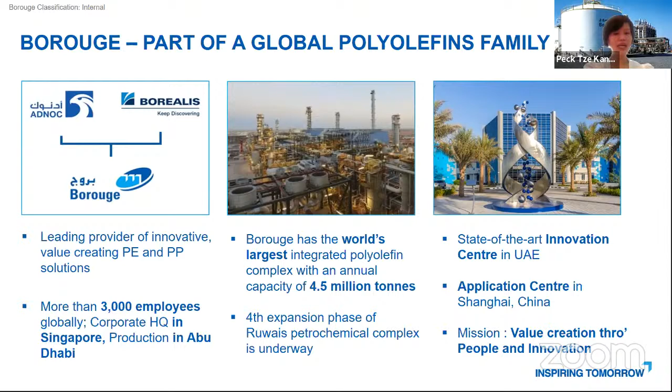First, a few words about Borouge and our commitment to sustainable development. Borouge is a polyolefin company, as shown in my background. This is our production plant in Ruwais. We are a company formed between ADNOC and Borealis. Together, we have 3,000 employees globally, and our Ruwais polyethylene and polypropylene complex has an annual capacity of 4.5 million tons, and we are on our 4th expansion phase. We also promote innovation, with a state-of-the-art innovation center in UAE and an application center in China. Our mission is value creation through people and innovation.

In response to global warming and climate change, starting from our parent company, we have a strong focus on sustainable development. Our parent, ADNOC, is one of the lowest carbon-intensive oil and gas producers, and we are strengthening that position with a 2030 sustainability goal to further reduce our greenhouse gas intensity by 25% by the end of this decade, and also expand our carbon capture capacity by at least 5-fold by 2030. That is equivalent to 5 million acres of forest in terms of carbon dioxide reduction.

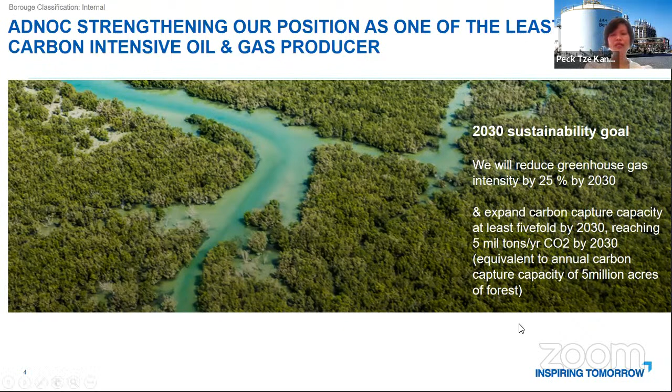For Borouge, our Ruwais operation works on a sustainability strategy based on 5 pillars: reduce flare, energy consumption, waste, water, and greenhouse gas emission. Year by year, our energy intensity and greenhouse gas intensity has been reducing, and we are striving to be one of the lowest greenhouse gas intensity polyolefin players.

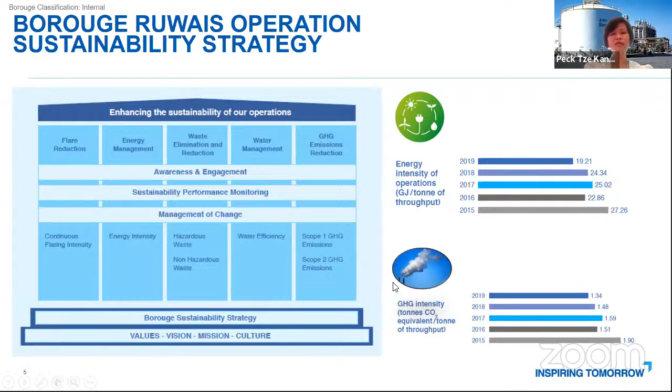A majority of our 4.5 million ton production capacity is dedicated to producing innovative infrastructure solutions used in utilities, for example, gas pipes, water pipes, construction like polypropylene for hot and cold water, and underground sewage systems, as well as industrial applications for corrosion protection and transportation of industrial media.

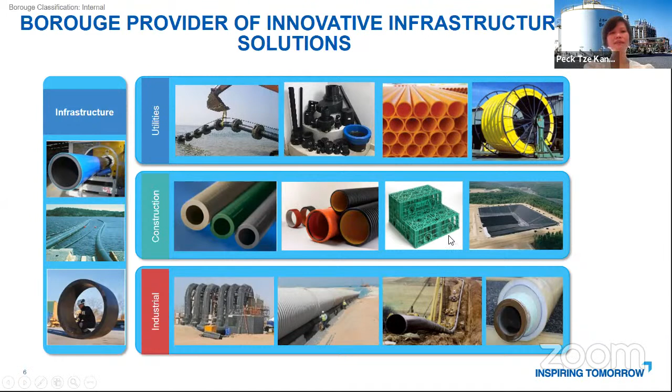For our products, polyethylene going into the pipe application has a positive environmental impact compared to traditional material. This is a study by the European Plastic Pipes and Fittings Association comparing the carbon footprint or environmental impact of polyethylene versus ductile iron, done on the basis of underground pressure piping for drinking water for 100 kilometer length and assuming a service life of 100 years.

Polyethylene is only a fraction of ductile iron in terms of environmental impact. This is assessed across the whole life cycle of polyethylene and ductile iron, from the product raw material to construction of pipe usage and end of life.

In the area of impacting the environment by taking resources, contributing to acid rain, impacting marine life, contributing to global warming, ozone depletion, and also smoke generation, polyethylene is actually much more environmental friendly. This is mainly due to its lightweight and ease of installation that allow fuel efficiency in the transportation of the pipes.

It has long length and coilable system, reducing the number of joints. Hence, less men and machineries are being used in the jointing system. The operations also use less pumping energy because of a smoother bore with very low coefficient of friction. For maintenance, the joints are secured so well that there is very low leakage and low maintenance required. And for end-of-life treatment, polyethylene is a fully recyclable material.

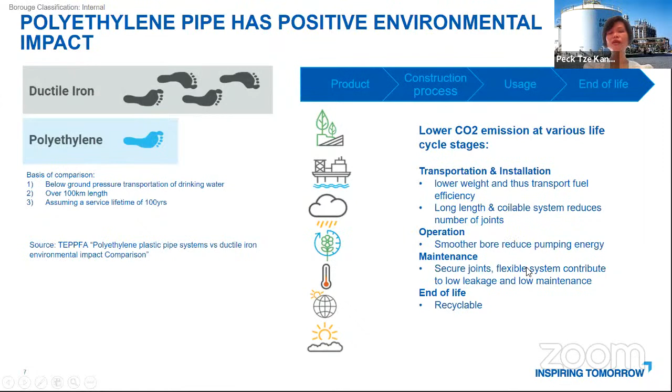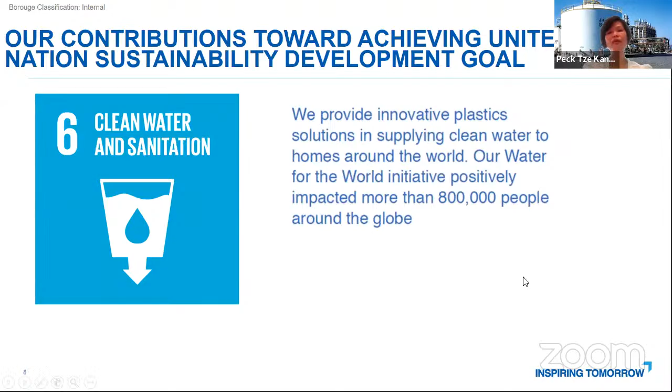With our products, we are also contributing to the Sustainability Development Goals of the United Nations. For UN Sustainability Goal number 6, clean water and sanitation for all, our innovative plastic solutions are supplying clean water to homes around the world. We have a corporate social responsibility program, Water for the World initiative, that has positively impacted more than 800,000 people around the globe. Polyethylene is not something new.

It's used for water and gas pipe because now we have more and more focus on sustainability development. We would like to also touch a few points on it being a sustainable and lower whole life cost solution for water transportation. So where can polyethylene actually be used?

It's used in water transmission and water distribution. For water transmission in high pressure and large volume transportation of water, we can use polyethylene for corrosion protection, like a 3-layer system with epoxy, adhesive, and polyethylene top coat. It can also be a standalone large diameter PE100 pipe up to 25 bar at SDR 7.4.

If the pressure and hence the wall thickness allow, polyethylene pipe can be made up to 3 meter or 3000mm OD. This is stipulated in ISO 4427, the ISO standard for PE material used in water pipes. In the area of water distribution, PE100 and PE80 could fully cover the operating pressure requirements.

It has a leak-tight fusion joint, resistance to ground movement because it's so flexible, and is generally resistant to acidic and basic soil conditions. For transportation of drinking water with chlorine and chloramine disinfection, polyethylene is able to operate well within the aesthetic level.

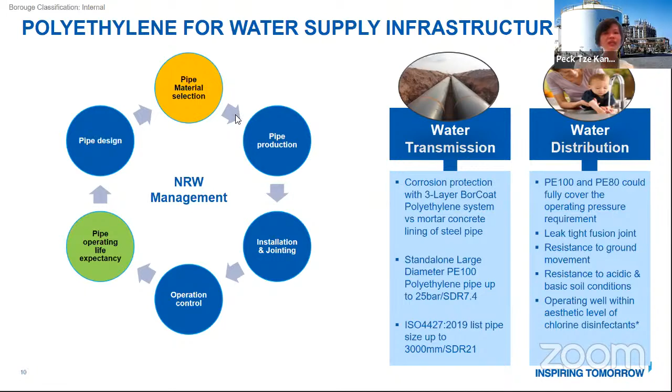Today, we would like to focus on the material because this is what Borouge specializes in. We have 20 years of supplying PE material into this application. Also, our other parent, Borealis, has been the leader of polyethylene for infrastructure application for more than 50 years. So polyethylene pipes are widely chosen for new development and asset upgrades for water application.

It is resistant to corrosive soils. It's so flexible that it can be coiled in very long lengths, even for pipe sizes with OD 180mm, it can be coiled as well. Hence, it is quite resistant to ground movement.

In any cases of earthquakes, if we look at the failure situation or statistics of all the piping systems, polyethylene would be the one with the lowest or even no failure.

With respect to temperature and weather change, unlike other materials which might have more failure in winter or summer because of soil conditions changing according to the climate, polyethylene is generally resistant to such temperature and weather change. From an operating point of view, there might be water hammer and pressure surge, but polyethylene is quite resistant to short-term pressure change up to 3 times its nominal pressure.

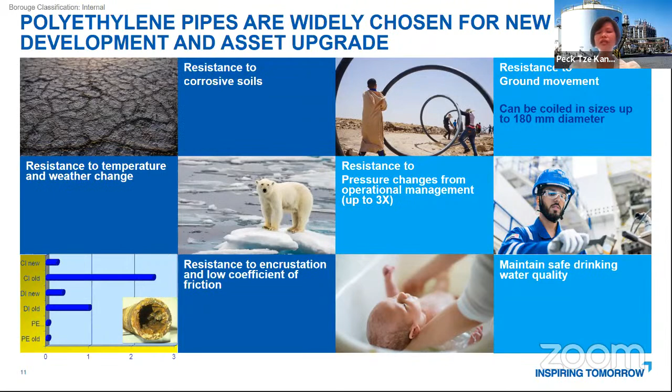In terms of corrosion, it definitely does not corrode like traditional materials. Hence, it's able to maintain a very low coefficient of friction in the inner bore throughout the whole lifetime of 100 years. For polyethylene used for drinking water, it has a specialized additives package that should not be detrimental to health, so it's able to maintain safe drinking water quality.

Now, we are aware that cost is also a very big consideration when deciding the material for the piping system. However, if we are just comparing the cost of the pipe itself, this may not give us a full picture. We should be considering the whole life cost of the system, which consists not only of the pipe, but also the installation cost for a real project.

A real project could be happening on a busy road in an urban setting, whereby you need to take care about traffic management, resurfacing of the road, and you want to have something that can be installed as fast as possible. We should also look at the future operation, maintenance, and repair costs of the full system for the whole expected lifetime of the assets.

For example, 100 years. So a way to do whole life cost is to build a model of a piping system. In this case, a 5-kilometer pipe system with 2 branches, 4 sluice valves, and 2 air valves. We're going to compare the whole life cost between 3 materials: ductile iron, GRP, and polyethylene. The size is 400mm for ductile iron and GRP, and 450mm for PE, which is dimensioned by its outer diameter.

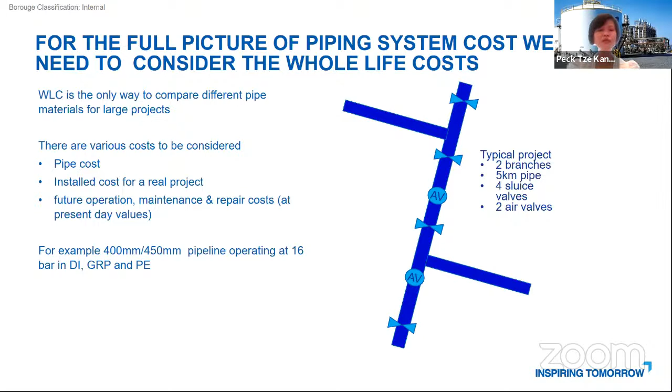So this is done in the UK context, in an urban situation. First, we look at a 5-kilometer pipeline for the installation cost. As we can see from the bottom, for the pipe cost itself in the orange portion, the picture may not look so good for the more innovative plastic material like polyethylene.

As well, excavation, removal, and installation costs could be quite similar. However, when it comes to joining, traffic management cost, and staff and site supervision, polyethylene is actually much lower because it has less joints, it's faster to install due to its lightweight and use of less machinery, and it does not really need anchor blocks. This speed up of installation also reduces the total installation cost.

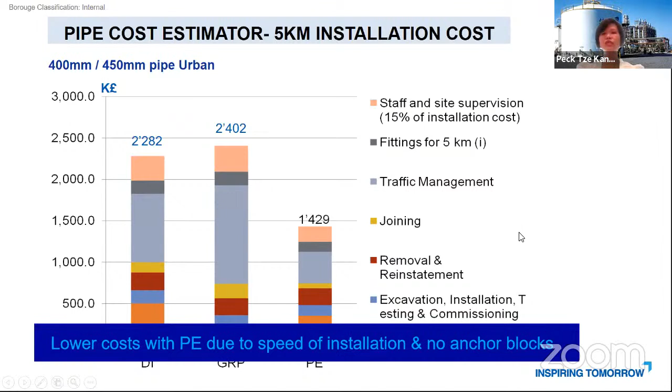Now let's look at repair costs. This is based on UK Water Company statistics of failure. For ductile iron, the failure rate per 100 kilometers per year is 7.5. For polyethylene it is half of that, which corresponds to a much lower repair cost for the whole lifetime of the system. In this case, assumed at 50 years.

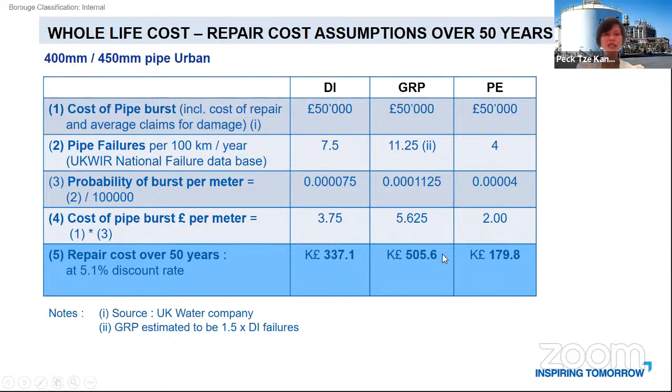So in total, if we compare the whole life cost of the 3 systems, even though the upfront cost of the pipe is much higher, the totality of the whole system cost is actually much lower because of faster installation, lower repair cost, and lower operating cost.

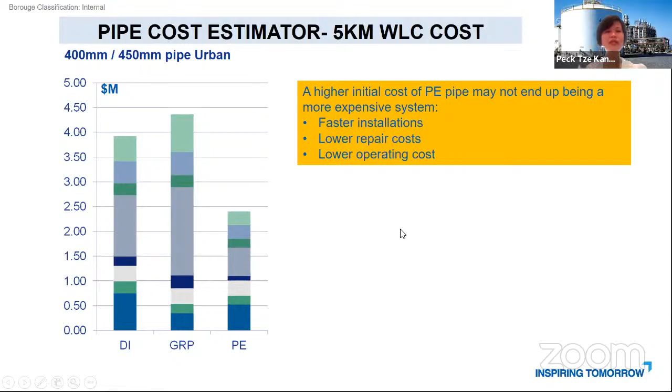Now we would like to give some tips on best practice in water transmission and distribution with polyethylene pipes. Not all polyethylene is the same. We have also seen polyethylene being used for packaging, disposable bags, and rigid packaging like jerry cans. But what is exactly needed or specified for PE material used for pressure piping?

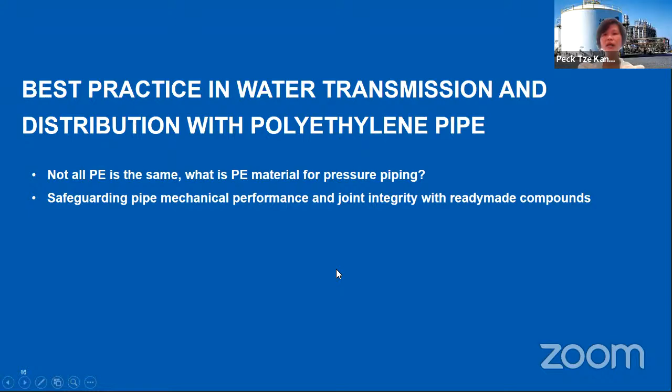There is actually always a way to go around by using a mix of material, like a natural PE with some color master batch. That is actually quite detrimental to the mechanical performance and joint integrity of the pipes. Later on, we'll show studies that we have done to prove that this is actually quite a bad practice.

So PE has been used for a long time, especially in gas. It's one of the best materials. Over 50 years of track record starting from the 1970s, PE has been used for gas, and we know that this application cannot tolerate any failures. As we can see here, starting from the UK, they have been using orange pipes and yellow pipes, PE100 and PE80 respectively, for gas pipe.

Coming closer to us in Southeast Asia, Indonesia is also having quite a boom of gas piping requirements, as well as India. India has a lot of city gas distribution projects going on, and they will only specify compounds, ready-made compounds, for gas application.

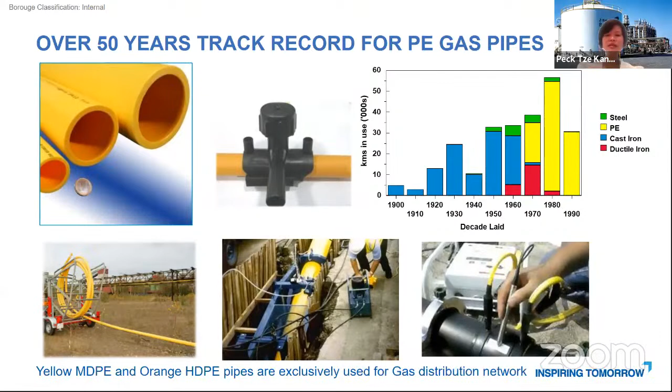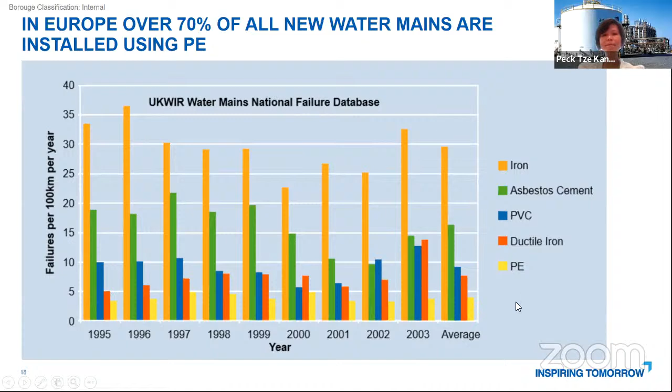A more recent study in 2020 done by Dr. Timothy for Anglian Water region looks at the impact of environmental factors on leakage in their piping system. The cyan bar refers to polyethylene, which has the higher portion of pipe length in kilometers being used. It's used so much, yet the failure rate is conversely very low.

This is based on a lot of reasons, because the Anglian region in the UK has very aggressive soil conditions with clay that has high shrinkage. So brittle systems like AC pipe, and even some older generation PVC, fail during summer when the clay is drying up and shrinking. And in winter, metallic pipes will fail quite a lot as well.

So they do have weather conditions to consider, and they find that PE is one of the best materials, and it's always the material they are now considering going forward.

We still see some failures for polyethylene pipes, and for the Anglian region this is usually because of jointing. Jointing with electrofusion is actually quite a specialized way of jointing, and we need to have good training with the welder.

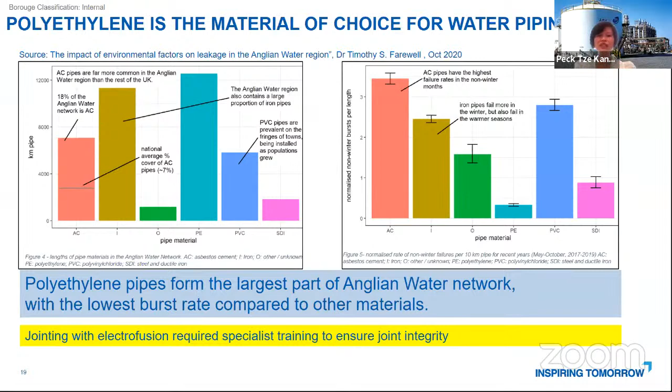If we come to our situation in a region like Malaysia, there is an aim to reduce the non-revenue water percentage down to 31%. Historically, all kinds of piping materials have been used, and polyethylene actually makes up about 20% — one-fifth of the piping system is using polyethylene.

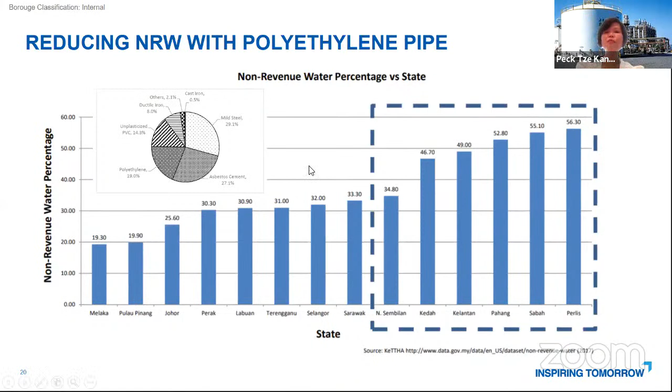I think it will be of great value for us to share with you what is a good material for pressure pipe application in terms of polyethylene. There are many things we know about polyethylene for pipe applications, but there are also some things we are not really so clear on — some myths, some rumors — but I think this is a good platform to clarify them.

Definitely for corrosion resistance, polyethylene plastic systems have no such issue. It's flexible and lightweight, and able to withstand a lot of ground settlement issues. The fusion joint itself is one of the best ways because you don't introduce any foreign material into the joint — it's purely PE to PE with heat. However, there's still a leak tightness issue, which we will address later.

How do we actually ensure 100 years design lifetime with polyethylene? Polyethylene pipes come from polyethylene materials, and we supply them as ready-made compounds — little granule pellets that consist of all the additives and carbon blacks needed for the whole lifetime. This needs to fulfill certain standards, which we'll show you later.

There might also be some question about chemical resistance. Generally, to acid and base, polyethylene has no issue. For disinfectants used in drinking water, chlorine and chloramines have been used quite widely, and in a normal temperature range, it should not be an issue.

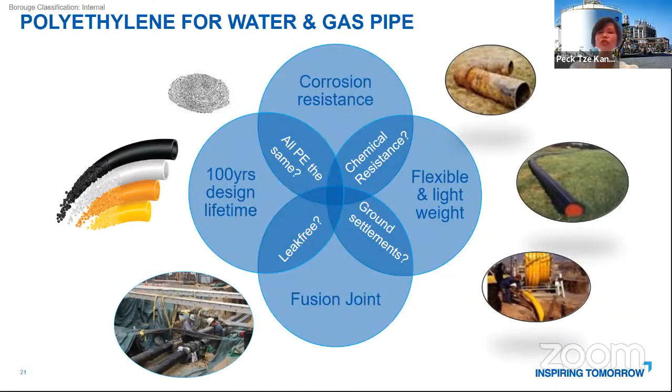So what are the standards that PE material for pressure pipes should fulfill and comply to? For gas applications, it's ISO 4437, and correspondingly there's a European standard called EN 1555. As you can see, there are 5 parts for ISO, and 7 parts for the European standard. This touches on general requirements for the material, the pipes, the fittings, the valves, fitness for purpose, and on the European side, also guidance for assessment of conformity.

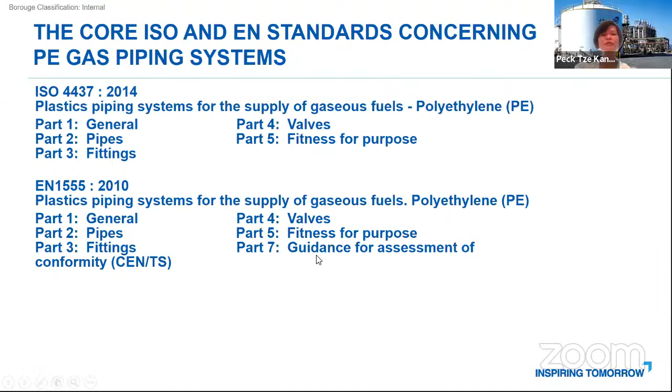Now let's look at the water standards. The water standards are actually quite similar to the gas standards, except for certain specific gas requirements. So we can see that at the standard level, the basic criteria or specification is the same.

I also have a note here that the Malaysia standard currently is based on EN 12201, which I think we have a version from 2011. It's going to be updated soon, and likewise MS 1058 will be updated. With these updates, we are able to set or update the requirements of PE in various aspects, for example slow crack growth and also MFR.

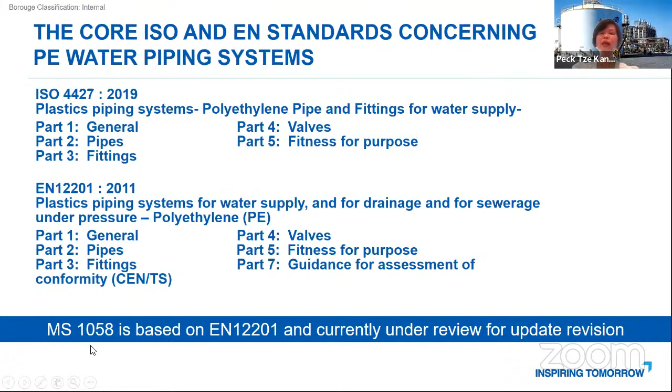Okay, so what exactly is written in these water and gas standards, in part 1 and part 2, for the material and the pipe?

First and foremost, since we've been producing this PE for such a long time, we're focusing on material properties, where we need to ensure that the granules fulfill all performance requirements with these additives. Carbon black master batch has been added to provide UV protection.

When it comes to carbon black dispersion requirements, there's also quite detailed stipulation. Carbon black content needs to be between 2 to 2.5 weight%. Pigment dispersion has to be rated according to standards to have not more than grade 3, and a dispersion rating of not more than B.

The carbon black also has to have a certain size, not too big, because if the particle size is too big, you don't actually get very good UV resistance. So 10 nanometer to 25 nanometer will do the job.

In terms of material properties in the form of pipe, it must have MRS classification. So we have our Borstar technology to tailor-make a bimodal structure that is good for strength and also processability.

However, we still need to prove that this is a material that can last for 50 years, or even 100 years, as a PE80 or PE100. As well, the other two pillars of long-term performance are RCP and slow crack growth.

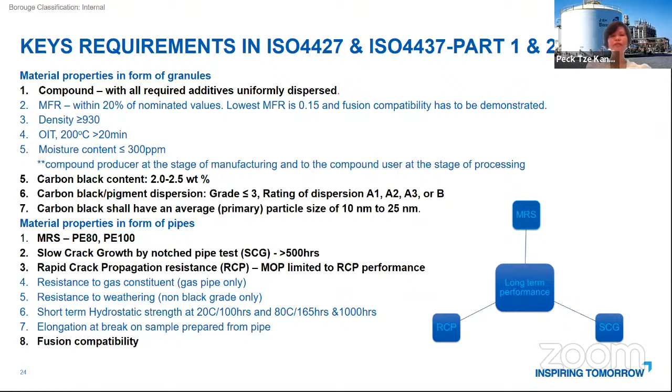Last but not least, we need to look at fusion compatibility of the pipe material. So allow me to talk a little bit about MRS testing. MRS is the minimum required strength that characterizes a PE material for pressure application.

It is a test that will take us up to 1 or 2 years to complete, to certify that the material can go into a pressure pipe application.

This hoop stress level will be between 2 levels, A and B. So a PE100 material simply means that it's between 10 and 11.19. Anything above it would be something like a PE125, which currently there is none in the market. A PE80 material will be slightly lower, between 8 and 9.99, and so forth.

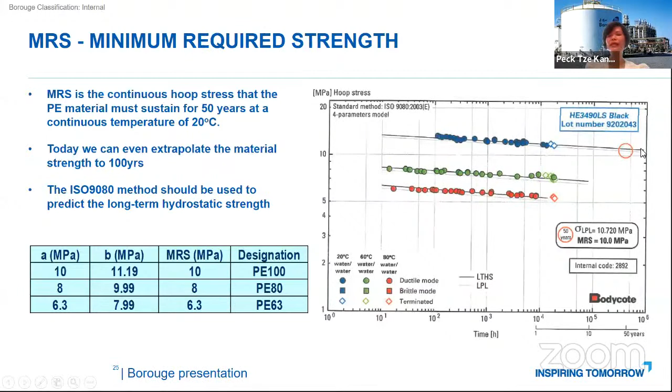So why do I talk about 100 years? From the material point of view, this line can actually extrapolate to 100 years. So 50 is here, 100 is just a little bit more. Nowadays, we are actually talking about 100 years lifetime with polyethylene material.

Slow crack growth: pipes are quite handled on site, and sometimes we introduce scratches to the surface of the pipe. When that happens, even when the stress is removed, the notch created on the surface of the pipe will start to grow and penetrate through the pipe wall.

This is because the stress at the tip of the crack is always higher, and it breaks the polymer chain over time. So a good material, or the more advanced polyethylene, has very good resistance to stress crack resistance. Today, the standards are talking about 500 hours by notch pipe test.

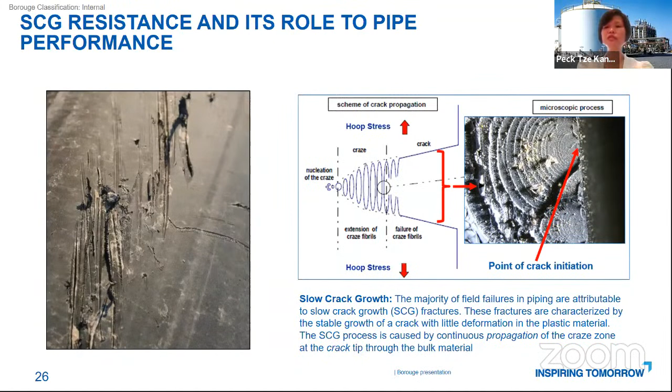There's also PE100RC, which Amos is going to touch on later, that has an even higher requirement for this property.

Now we are talking about carbon black being a very instrumental additive in polyethylene pipes. The function of carbon black is primarily for UV protection. Otherwise, the pipes under transportation or even above ground installation will be subjected to UV degradation that breaks the polymer chain over time. A good distribution of carbon black in polyethylene is very important.

Does it make a difference if a pipe converter uses a natural material and adds carbon black master batch in the pipe extruder? Yes, there is a difference, and we have done this study to show that a ready-made compound with granules already containing the carbon black and additives is a much more secure way to ensure performance and quality. In our study, we did two approaches. One is making our pre-compound the normal way using our big twin screw compounder in our polymer plant, and then taking these pellets and extruding the pipes.

We call it sample one. It is made of pre-compound material with an extrusion speed of 100%. We have a parallel comparison using natural PE material and adding carbon black master batch, doing a simple mechanical mixing and putting it in a pipe extruder. We have samples 2, 3, and 4, done at different speeds: sample 2 has the same speed as sample 1, sample 3 is 80% of that, and sample 4 is 60%.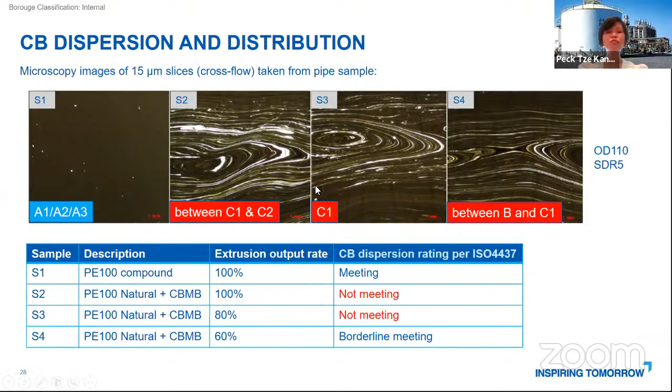So how do they rate according to the CB dispersion? They are actually not fulfilling ISO requirements - they are more than B. So in a very straightforward way, this is already not able to meet ISO requirements for a black pipe used in pressure applications.

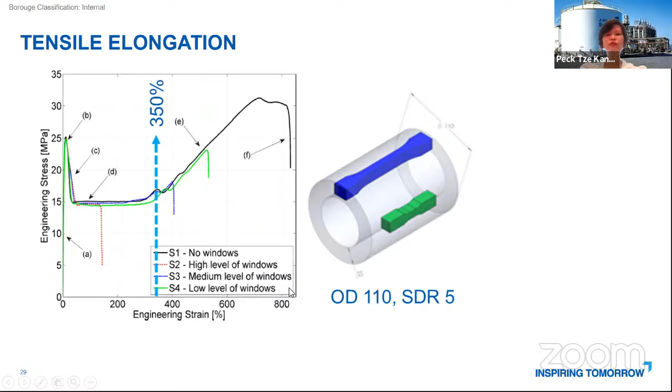What about the tensile performance of such a system? We did sample 1, 2, 3, 4, cutting dog bones from the pipes and doing a tensile test. According to standards, a tensile test on the dog bone taken from a pipe should surpass 350% elongation. But we find that sample 2, which we tried to run at the same extrusion rate as the normal system, could not meet it at all. For samples 3 and 4, we actually needed to drop the output quite a lot in order to fulfill these tensile requirements. So why is this happening?

As we know, there is a very poor distribution of carbon black, creating white areas and black areas. The black area actually has more carbon black concentration, so there is a stress point there. The stress point is the initiator of failure, which occurs much earlier than normal tensile performance. This is why we find it very difficult to meet the tensile elongation requirement if we do a salt and pepper mixing to produce the pipe.

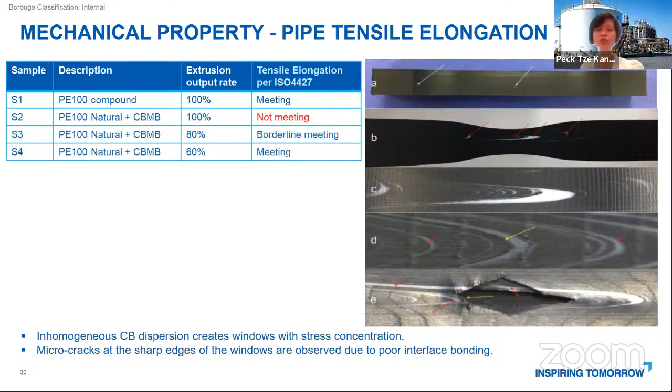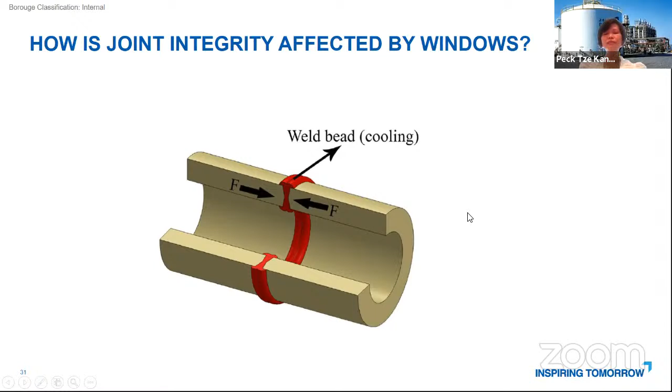So what about the jointing? If we join two pipes with very poor carbon black dispersion, is there any effect on the joint integrity? We did this jointing comparison between sample 1 and the other three samples. What we did is first join the pipes, then cut across the joint in cross section and do a microscopic analysis. We see that it's very homogeneous because the two matrices are quite similar, so the melts are able to flow between the two pipes.

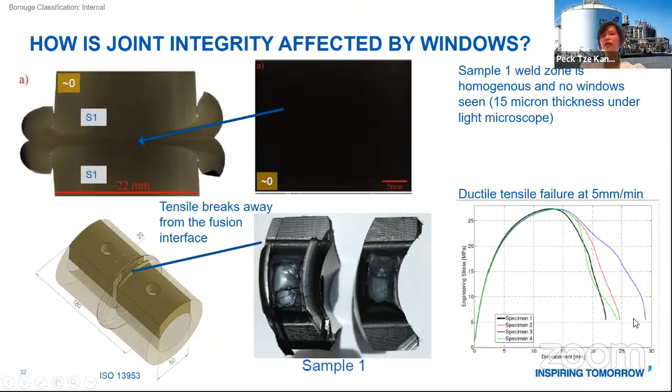We also make a very narrow waist sample across the weld and do a tensile test. When we do this, the joint is so strong that failure does not occur there - in fact, it occurs a little bit away from the joint, and we can see a very ductile failure. In terms of fusionability, we are looking for a ductile failure when we pull the sample till failure occurs. This can also be reflected by the tensile displacement and stress test, showing the stress is able to go over before a good elongation happens prior to failure.

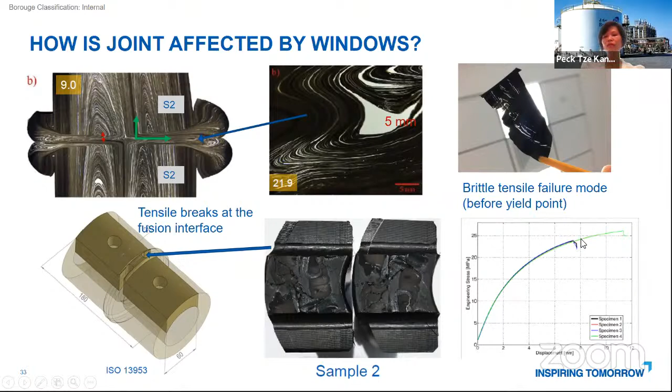Okay, so this is one way to ensure on the raw material side, we are able to secure the joint.

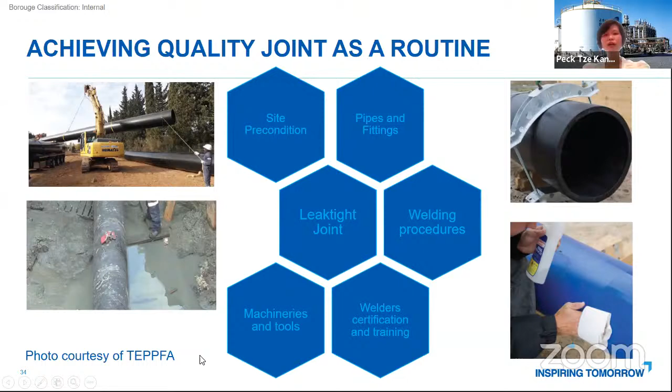So I think we got all these photos from the European Plastic Pipe and Fittings Association. If you want more information, you can always visit the website. There's a lot of good information there. So there's also no lacking of jointing procedures. It's a matter of enforcement and implementing good practice in the jointing.

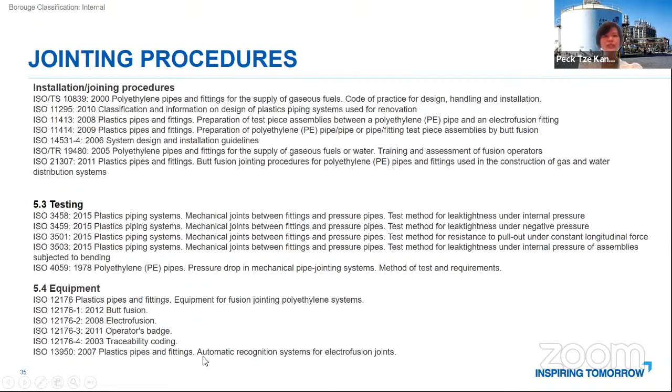Okay, so actually, as we showed in the beginning, the PE gas pipe experience with polyethylene is very positive, and that is matched with a very stringent quality assurance system, starting all the way from raw material to pipe production to installation and operation. We should also translate this good practice to the water pipes so that we can successfully reduce our non-revenue water loss.

Definitely, we can start with use of pre-compounded black. I know the Malaysian standard already specifies pre-compounded black, but it's a matter of enforcement of standards. So the end user, like water companies, can also set their own specification as a way to control the raw material, the pipe, welding, and installation, so that we have a full chain guarantee in terms of quality.

And also, we can look at use of good welding machines, certified welders, traceability of the welded joints, and proper inspection to ensure the use of specified material and accounting of raw material batches and quantities against the pipe produced.

And as polyethylene is always undergoing innovation, we have advanced material. Every few years, we will have new material coming up. So if you have demanding applications, you could also consider our high-stress crack-resistant material, which later on we will be touching on.

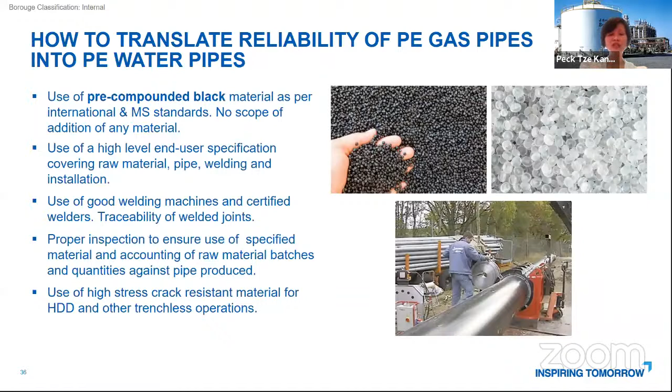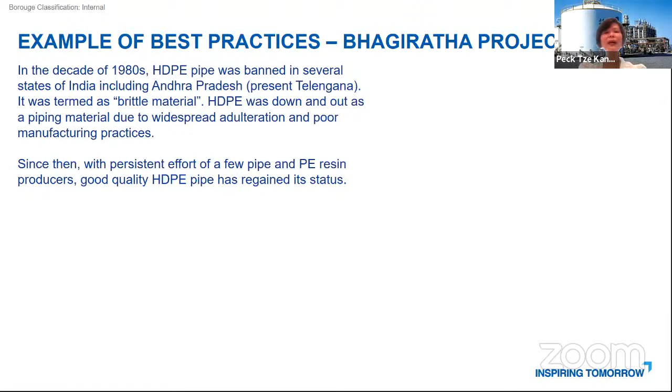Okay, so today I actually have two colleagues from India also joining us in this webinar. I have taken their best practice success case in India to share here. This is the Bhagiratha project. So why is this so significant?

Now in India, they had also been using HDPE for a long time. In the 1980s, however, the reputation suffered by the PE industry because poor material has been used, poor quality PE material has been used. It has been termed as a brittle material, and it has been banned in many states, including Andhra Pradesh. This is because of widespread adulteration and poor manufacturing practices.

But over time, with good efforts, persistent effort of pipe producers and resin manufacturers, we are able to continuously supply the market with good quality pipes to regain the status.

And more recently, there is a big project in the Telangana state for their water grid. They have implemented the largest ever water project utilizing 80,000 metric tons of HDPE, and the majority of them are using PE100 black material. So other projects also follow, like the Kaleeshwaram project, which is a big irrigation project in that state, and other states as well, like MP, UP, Jharkhand, Odisha as well, has specified PE black.

So this is very remarkable because in India, the specifications still allow the salt and pepper material. But when you allow this, there is the risk that you could actually face reputation loss of the material of a very good, potentially very good system.

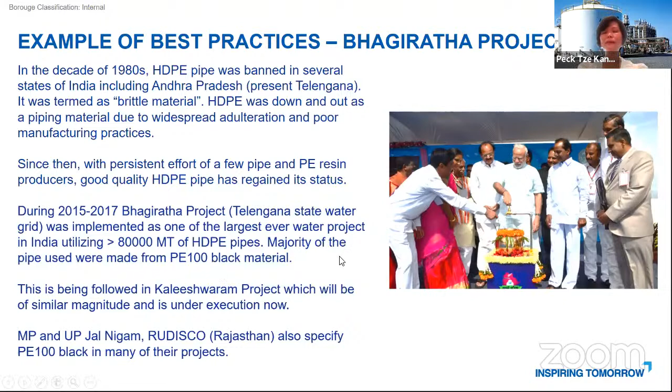Okay, so actually we do offer a very unique service to the industry called fingerprinting that will help you ensure that the material you are using is authentic material. So I'll pass this over to Amos.

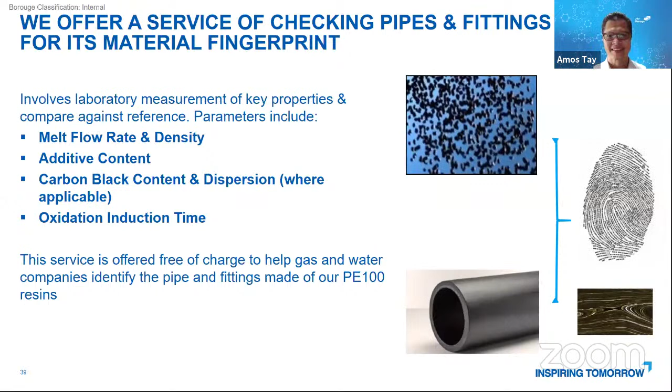Next, please. And this is to share the success of these services provided to Chinese gas and water utilities. It has been started since 2006 and continuing until now, 2020. You can see there are 610 samples already tested.

From 75% of non-Borouge material in the market, it has dropped down to about 10% on average. This shows a very important service that we provide to the company because a lot of pipes have been made, sent to gas utilities or water utilities claiming to be Borouge pipe for their system. But actually, when they send the pipe to us and we test it, in the beginning 75% are non-Borouge pipes, or rather, pipes not made of Borouge material.

And now, the counterfeiting activity for these services in gas and water has reduced.

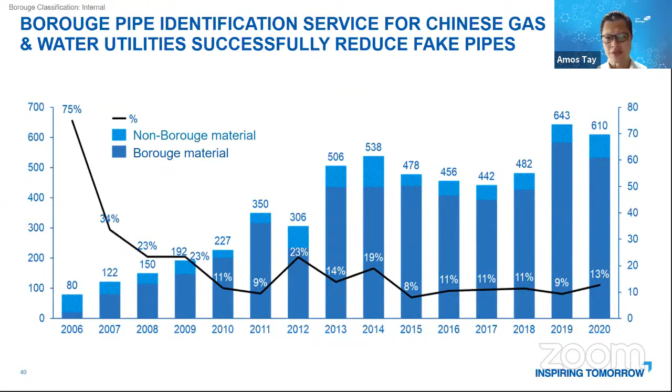Thank you. Next. Why do we do these services? This is to provide additional peace of mind that the PE pipe is made from virgin material, and serve as an additional verification process to increase end user confidence, and definitely minimize the potential expensive failure after counterfeit PE pipes were installed.

Because if you have installed some counterfeit pipes, it will not withstand the service life, as Peck Tze has shared about the leaks and damage and stuff like that. Then when you replace all the pipes, that cost is also included in the service of this system.

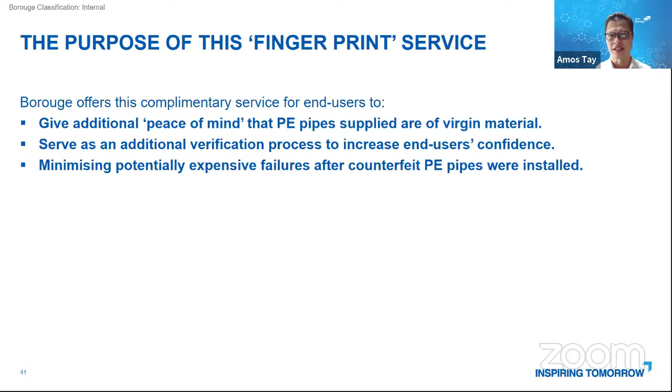Next, so much for fingerprinting to support the industry that good material has been used for pipe production. Let's move on to the next one: the development of material catching up with market needs. First is the PE100RC, and the second one will be large diameter.

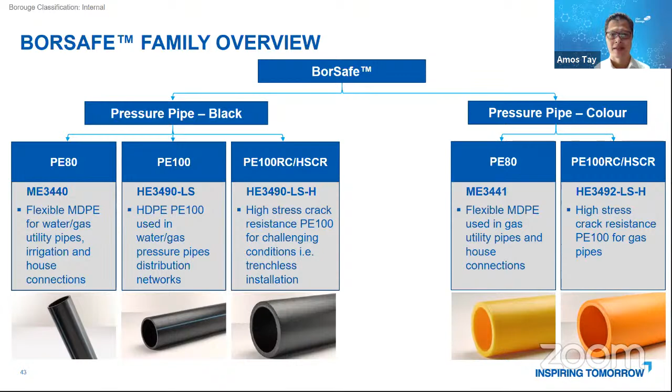What is open cut? Open cut is basically open trench. When you want to install a pipeline, for example, on the road, you stop the traffic, build a bypass so traffic can continue, dig a trench, open it up, and send some soil for removal because you have to replace it with sand bedding, lay the pipe, then put the soil back.

Then surface the road, open to traffic, and close the diversion. So there is a lot of cost and time to do this project with open trench. But with no-dig, you don't have to stop the traffic - yes, you still need a place to install the pipe, but this footprint will not be very large because you're not opening up the trench.

You are using techniques that go under the ground, through the pipes or through the ground, to bring the pipe into the other joint. So this is one of many ways of doing it.

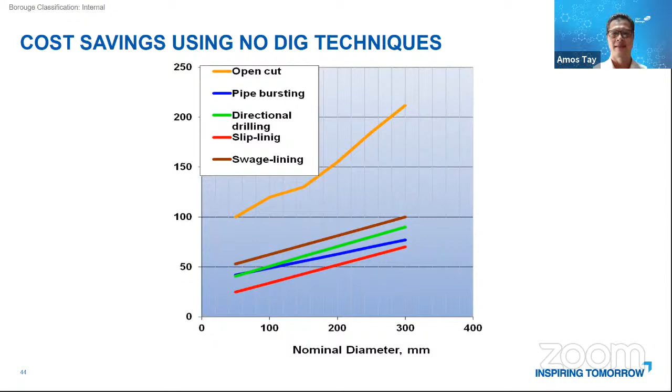This environmental factor concern is becoming so popular, as we have seen in the market about sustainability and so forth. So this is a trend that is coming, and definitely will be part of a tender to put sustainability or environmental impact into the requirement.

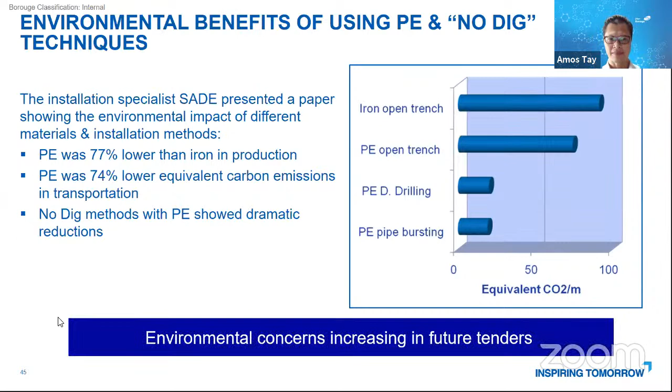Now we talk about RC. What is RC? PE100 RC is raised crack resistance, or HSCR, high stress crack resistance. This has an improved slow crack growth resistance, which was shared earlier in the graph. When you have a cut in the pipe surface, this growth will take time and grow through the wall thickness, and then the pipe integrity will be suffered. But with this feature, the slow crack growth will be there, but it takes a longer time to grow through the pipe wall.

This material is preferred for installation like no-dig, horizontal directional drilling, because you're going through the soil and you don't know what's inside it. There may be some hard stone that may be cutting the pipe when you pull it through the ground, and also in pipe plowing and other techniques.

With the current EN standard, development is still ongoing, and it will be defining this RC requirement. Then we'll be able to see what stipulates RC, what is required to be achieved by the material in order to call it RC material.

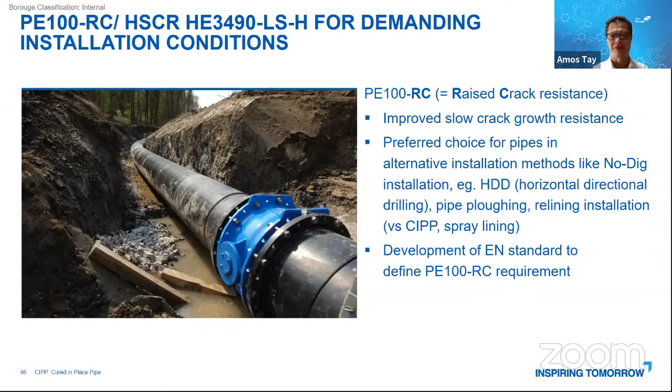So much for the pipe material designed for this demanding installation area. Now we move on to the next one: this is the large diameter pipe, or rather material designed for large diameter and thick wall pipe, which is the HE3490-ELS-H. This one is especially for industry, mining, or even nuclear plant cooling pipe systems. This material has been used for this kind of application.

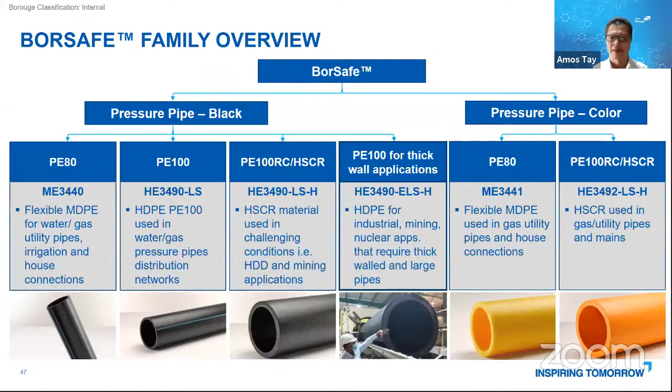You might say, okay, the price is too much to pay for a PE pipe, I'd rather buy a steel or iron pipe, because the thickness doesn't increase too much for traditional material like iron and steel, but it still takes high pressure. For PE pipe, the thickness has to increase to take in more pressure. That's why the cost could appear more expensive in the beginning.

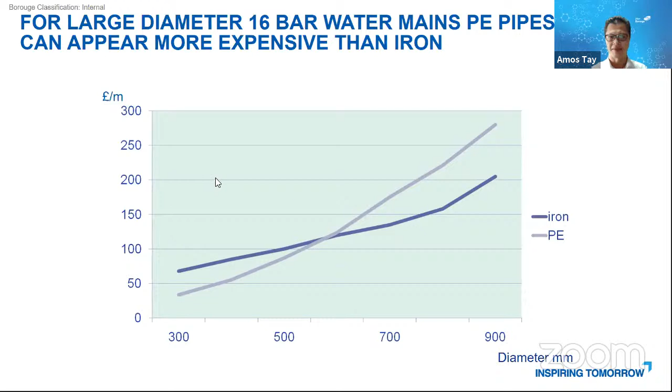With this ELSH material, because of its greater resistance to flow against gravity, when the pipe comes out you get a more even or better wall thickness distribution across the circumference.

This will reduce your cost in terms of material wastage, production cost, there's less scrap, and then of course man hours and stuff, all these are included. So there's a lot of saving.

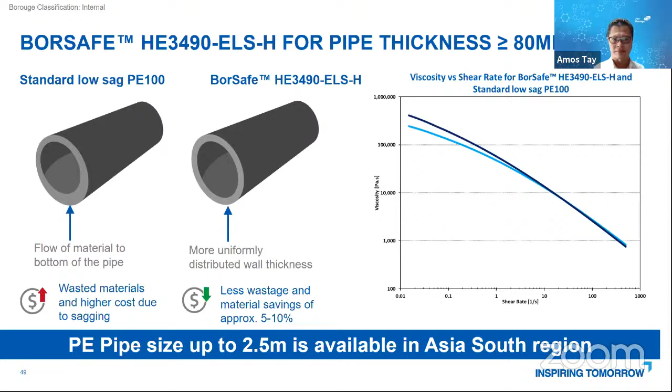And by the way, the PE pipes can reach up to 2.5 meters already in Asia. Here is just an example of this material being applied.

So in Vietnam, the pipe producer is Thien Phong Plastic, also known as T4 Plus. They have this project, the Minh Phu project, for the supply of seawater into the prawn farm.

So the pipe sizes made were 1200 to 1600 mm, SDR 11 to 17. So the wall thickness ranged from 94 mm to about 109, which is very thick wall. Typical material will not be able to achieve this thick wall without a sagging phenomenon.

So their challenge was to find a suitable PE100 material that allows the production of this large diameter and yet even wall thickness. Also, this material needed to be resistant to corrosion by the seawater, because they are transporting seawater to the prawn farm, and need large volume.

And you know that other traditional pipes, maybe steel or ductile iron, will have encrustation, and then the pipe wall bore will be smaller. But with this PE pipe, the bore doesn't change. So the volume of water will be consistently filled to this prawn farm.

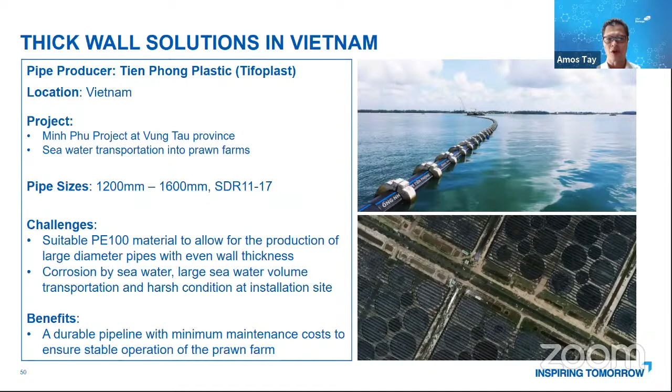So much for the PE material. Borouge also highlights 3LPE, 3-layer PE coated steel pipe for high pressure water mains. PE pipe can only withstand a certain pressure, and if you exceed that pressure, there's no way a PE pipe can be used. So a steel pipe can be used to transport water for higher pressure.

So for the India oil and gas industry, 3LPE coated pipes are the standard solution for corrosion protection of the steel pipe, because of exposure to the elements, you need to protect the steel pipe from corrosion. It's about 90% of the market share there. And globally, 3LPE is about 80% market share with a long-term record of about 30 years.

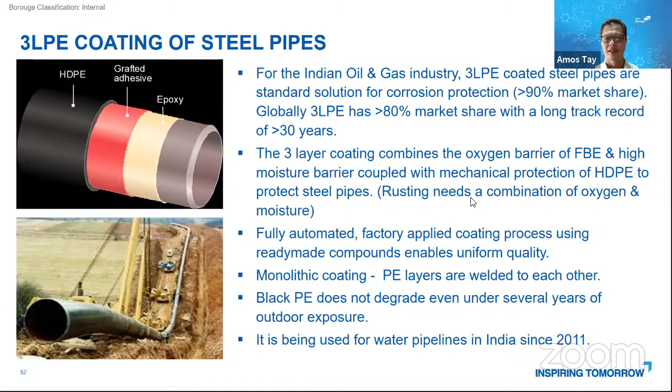This 3LPE is combined with an oxygen barrier of FBE, which is fusion-bonded epoxy, and a high moisture barrier with mechanical protection from HDPE, which protects this steel pipe. We all know that rust comes about when you have oxygen and moisture. If you block this oxygen and moisture from the steel pipe, you are protecting the steel pipe from corrosion.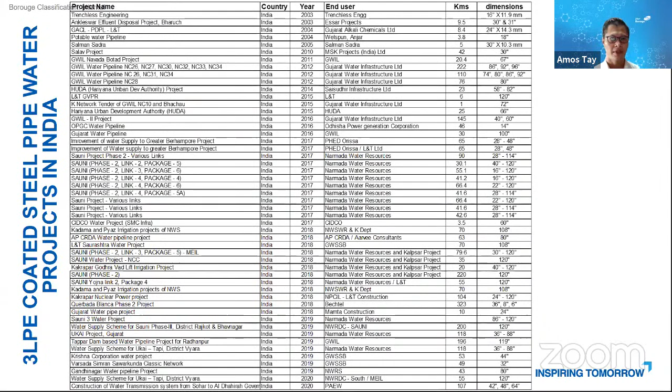This is outside India. Also, we see lots of projects until 2019, I think. So this is a list of the projects that you can take as a reference and find out about, because many projects have used these water pipes.

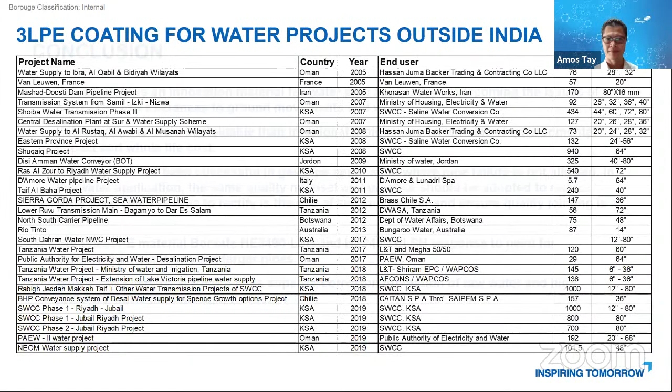So much about materials and all the other services. We can see that PE is an innovative material for water pipe application, overcoming many issues that we highlighted: corrosion, low tolerance of ground movement, as well as weak joints that will break because of this ground movement, and then water will definitely leak out.

PE has also been found more sustainable than traditional piping material, with lower environmental impact and whole life cost. This is something we need to look at, especially this whole life cost, because PE pipe material could be just higher cost by itself, but the whole life cost, including services and long-term application, is better costing compared to other materials.

PE has been successfully used in gas pipe applications, where pipe failure is not allowed, because when gas leaks, explosion - the consequence is too much for anybody to accept. So in water applications, the same quality mindset and practice should be adopted to reduce this NRW loss. One key area to rectify this is to reduce or not use salt and pepper joints and ensure quality joints.

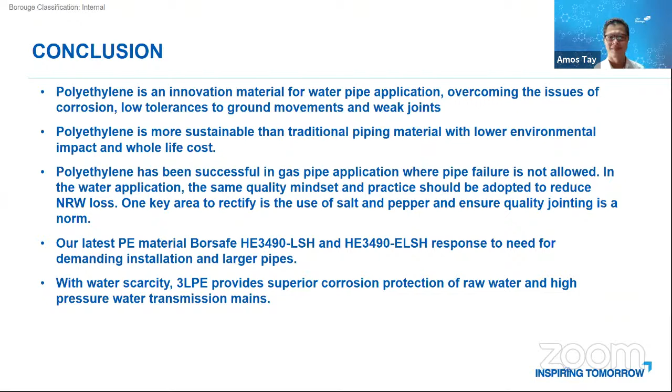Thank you very much for your attention.

Thank you so much, Mr. Amos Tay. Is there any more from Ms. Peck Tze Kang?

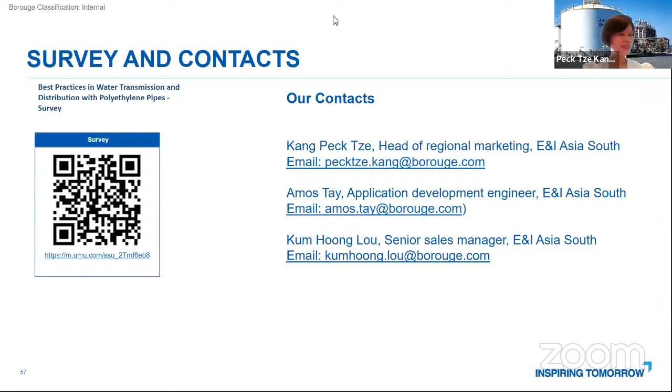The first question was about how HDPE is suitable against dragging and pulling of the pipe during laying and installation work. It is basically done by dragging and pulling only, especially the pipes which are cut in 12 meter lengths. Maybe coils are handled a little bit more carefully. But HDPE has excellent abrasion resistance - abrasion tests show it has 7 times more abrasion resistance compared to metals.

Especially if somebody uses high stress crack resistant material, these materials are designed to give 50 years lifetime despite notches and scratches, which can be up to say 10% of notch depth of the wall thickness. So HDPE is quite okay with dragging during the installation work.

The second question is HDPE pipe is not suitable for crossing trunk main roads, as the area will be subjected to aggressive and extensive traffic load. In fact, HDPE pipe strength was tested in the initial days by running a truck over the pipe, and nothing happens to the pipe because it's flexible.

So HDPE pipe, even with huge traffic load, will momentarily deflect itself, pass on the stress to the surrounding soil, and the moment the load is removed, it comes back to its original shape. So heavy traffic load doesn't have any effect on HDPE pipe functioning. It will never break, being flexible.

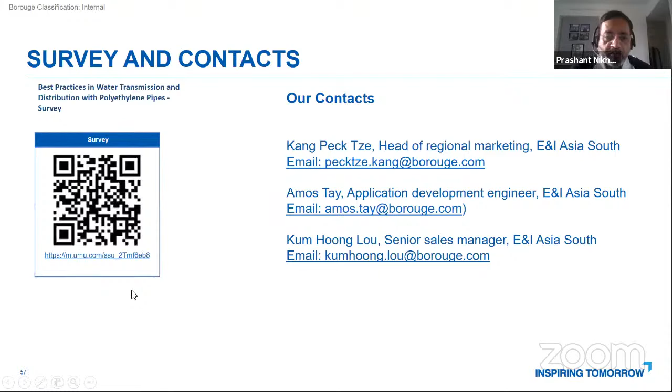Let me give you an example of HDD, what we have done. At least in the metros now, getting permission for open trench is very difficult. So if you want to do complete looping of the systems, everybody is going with HDD operations. At least in 3 metro cities, this has been used. So we have a specific material for that.

What people fear when they go with HDD is whether there will be scratches and things. Normally the high stress crack resistance material will not have any issues. At least in India, this HDD approach is very, very popular. And we have a specific material for that.

Regarding the dragging and everything, to the best of my knowledge, if you are not scratching the pipe more than 10% of the wall thickness, I believe there is no issue. But if you drag the pipe on a very rough edge and the thickness loss goes off more than 10%, then probably you should have a concern in that kind of situation.

But it's a regular practice to pull the pipes in the trenches or outside and then put it into the trench. So for HDD, and even if you do it outside, this applies.

Regarding the backfill, I will add that it is a good practice - if you have soft soil and there are no stones, use that same backfill, no problem. But if you know that the trench will have soft soil first and then hard rock will come, try to separate out both things.